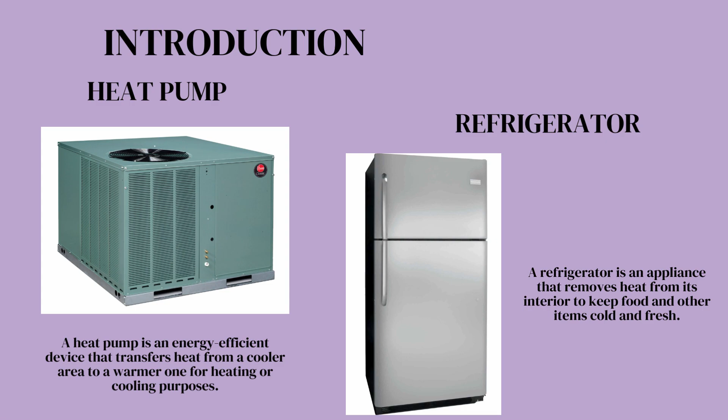Now, you must be very interested in the theory behind refrigerators and heat pumps. I'm going to start and show you the working principle of refrigerators. Refrigerators, just like heat engines, work in a cycle. This is a basic vapor compression refrigeration cycle. The working fluid inside the refrigeration cycle is called a refrigerant.

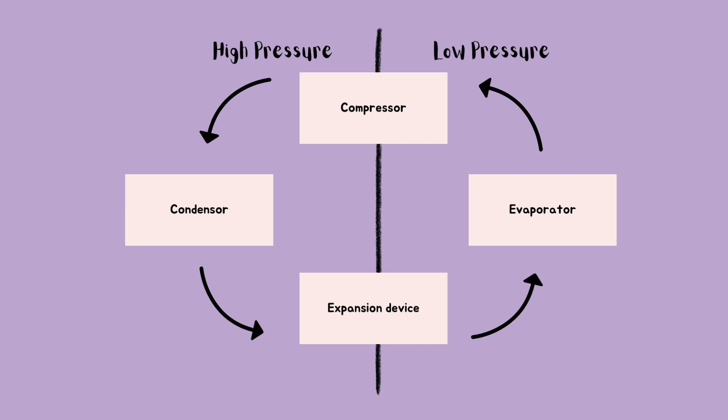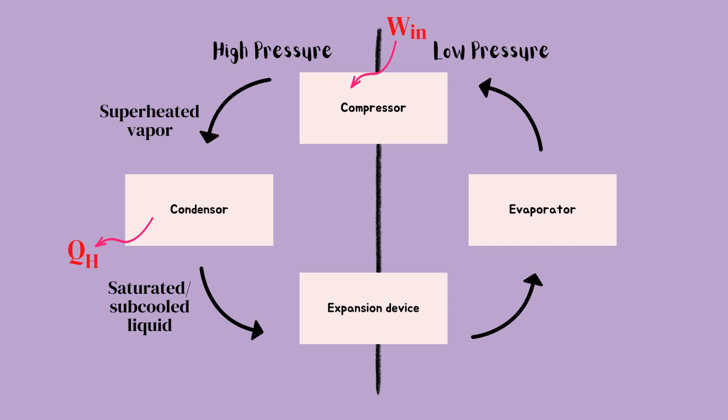The refrigerant enters the compressor as a vapor and is compressed to increase its pressure and temperature by consuming work. It then enters the condenser and condenses to a liquid and cools down. There is heat output since heat is rejected into the surroundings. It then enters an expansion device, which is used to reduce the pressure and temperature of the refrigerant in order to achieve a liquid-vapor mixture of desirable quality at the exit of the expansion device.

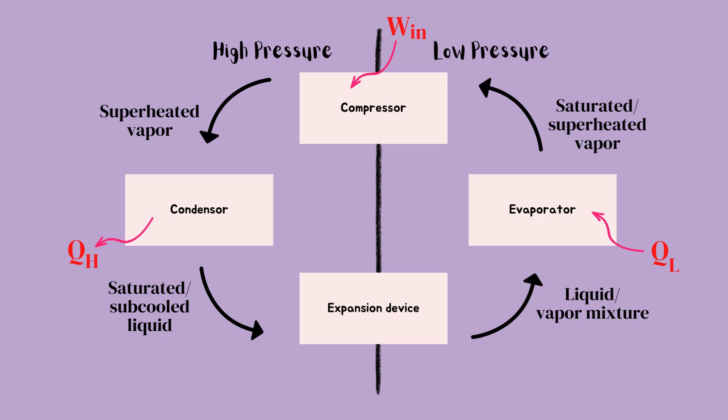Now, it enters an evaporator where the refrigerant evaporates by absorbing heat in the refrigerated space. The refrigerant changes from a liquid to a vapor. It will then go back into the compressor as a vapor, and the cycle repeats.

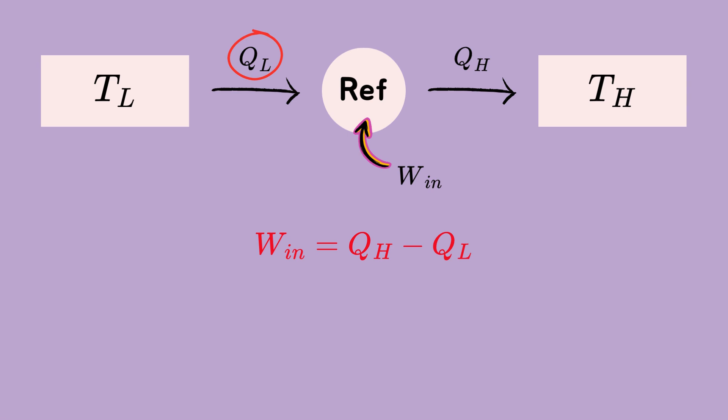Here is a schematic for analyzing the energy conservation in a refrigerator. The main purpose of refrigerators is to remove heat from a heat sink. Therefore, we are interested in the amount of heat that can be removed. From the first law of thermodynamics, we know that the work done on the compressor is equal to the heat released from the condenser minus the heat absorbed by the evaporator. The coefficient of performance of the refrigerator is a dimensionless ratio of desired output heat divided by the required work done, and the formula can be derived as shown below.

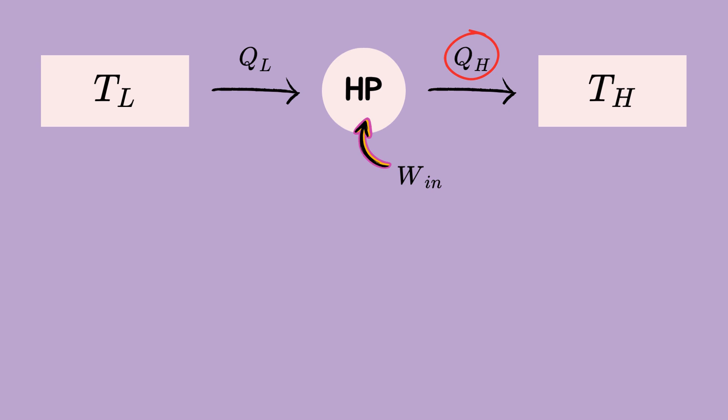Heat pumps absorb heat from a heat sink and deliver heat to a heat source by consuming work. They use the same vapor compression refrigeration cycle, and therefore the schematic is the same also. But different from refrigerators, the main purpose of heat pumps is to add heat to a heat source, such as the indoor space of a building, and we are only interested in the amount of heat that can be transferred from the condenser to the heat source. Hence, the coefficient of performance of heat pumps uses the same concept as before, but we change the desired output to the heat released from the condenser, and the formula is derived as below.

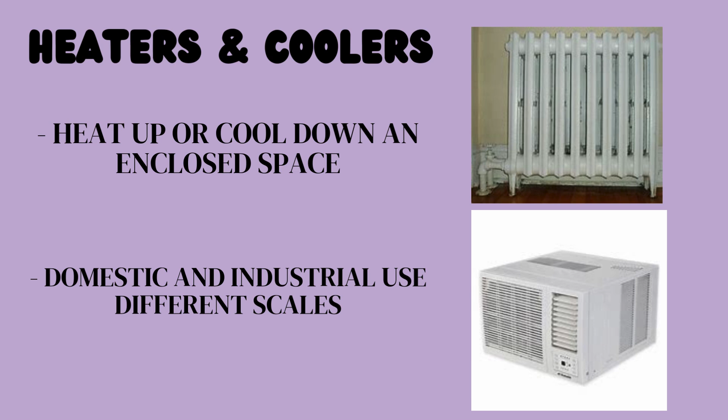Heat pumps are used very widely for many purposes due to their versatility. Thus, they have many practical applications. Firstly, heat pumps can be used as heaters or coolers. They heat up or cool down an enclosed space by transferring heat towards or away from the designated place. Typically, industrial heat pumps transfer more heat faster than domestic ones due to the sheer scale of industries being way larger than domestic ones. Next, a heat pump can surprisingly work as a dehumidifier.

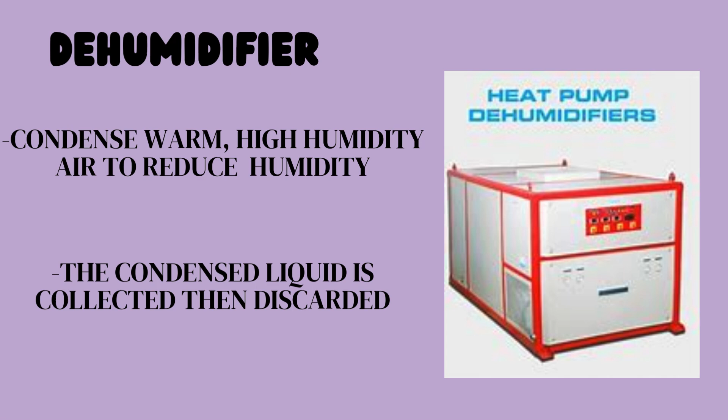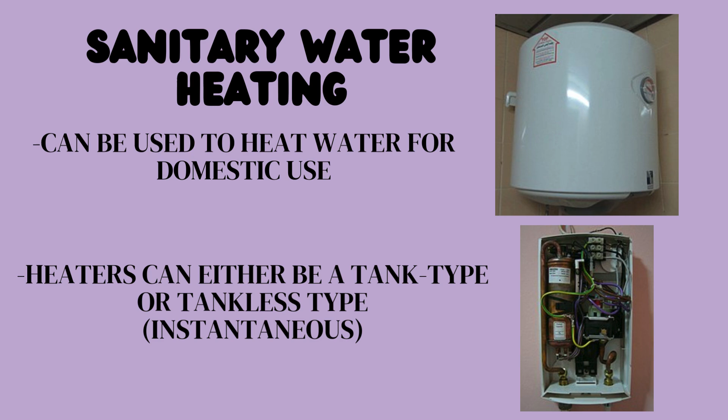By cooling down and condensing very warm, wet air into liquid, the water content in said air decreases. This is usually done to protect items such as furniture or machinery in places where humid air is very common, such as countries in tropical climates. In addition, heat pumps can work to heat up water for domestic use. These heaters can either be a tank type or tankless type, in which the water is heated directly for use. Each purpose and situation would call for different heaters, hence the two types.

Finally, another extremely common use of heat pumps is in refrigerators, in which they keep food fresh and edible. Most modern households, restaurants, and factories are sure to have at least one, due to the sheer importance of edible food in society.

Next will be the weaknesses and strengths of the heat pump. For the weaknesses of the heat pump, it has a high initial installation cost, is less effective in extremely cold climates, requires electricity to operate, and may need backup systems in freezing temperatures. And lastly, its installation can be complex.

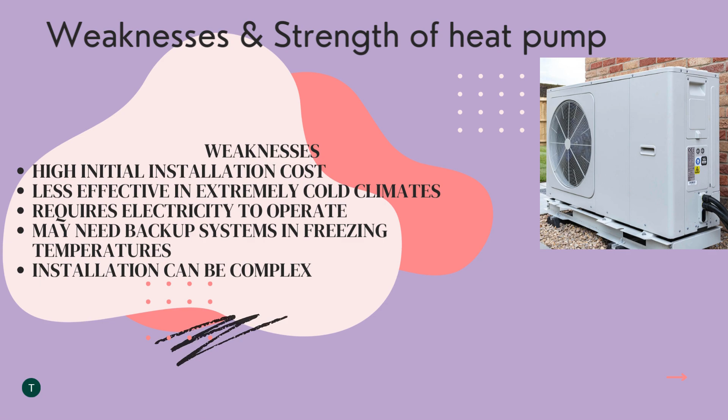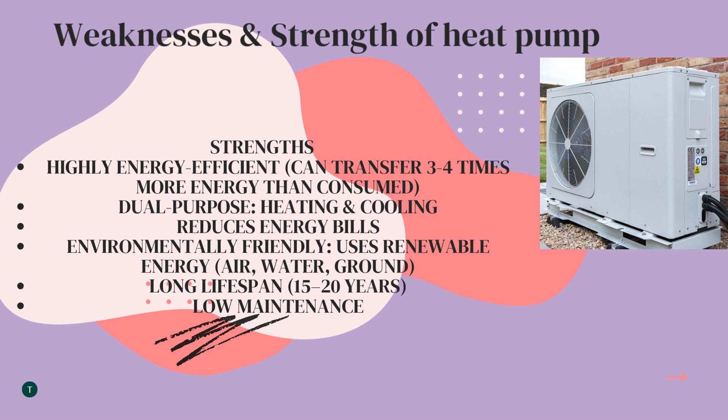For the strengths of the heat pump, it is highly energy efficient. It can transfer 3 to 4 times more energy than consumed. It has a dual purpose, which is heating and cooling. It can also reduce energy bills. And it is environmentally friendly because it uses renewable energy such as air, water, or ground. It has a long lifespan of 15 to 20 years, and it has low maintenance fees.

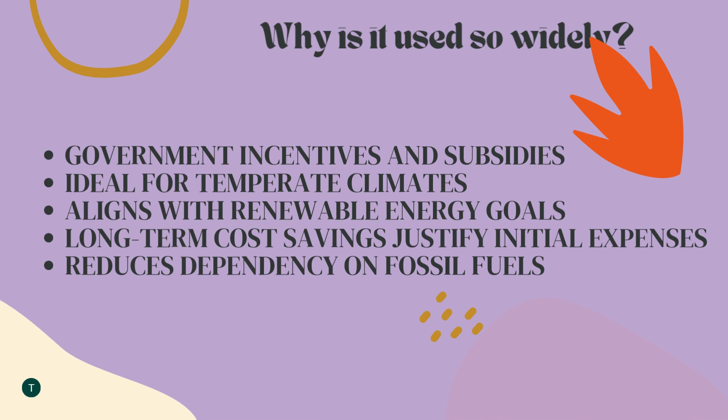So why is the heat pump used so widely? Firstly, because of government incentives and subsidies. Secondly, it is ideal for temperate climates. It also aligns with renewable energy goals. It has long-term cost savings that justify initial expenses, and lastly, it reduces dependency on fossil fuels.

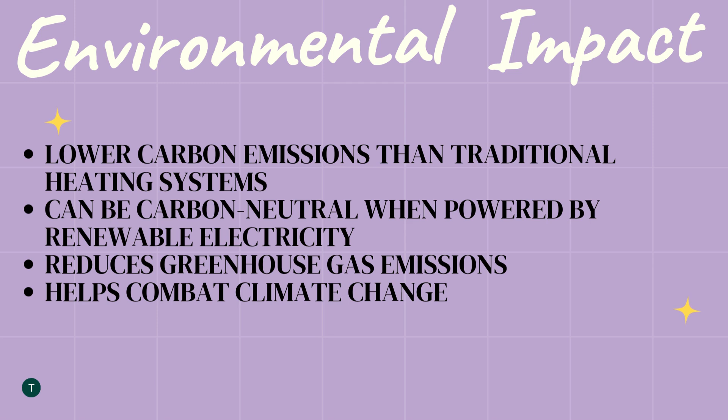However, it still has an environmental impact. Firstly, it has lower carbon emissions than traditional heating systems. Secondly, it can be carbon neutral when powered by renewable electricity. Thirdly, it also reduces greenhouse gas emissions. And lastly, the heat pump will help combat climate change.

So here are two questions I would like to ask. For the first question, in a refrigerator, heat is transferred from a lower temperature medium, which is the refrigerated space, to a higher temperature one, which is the kitchen air. Is this a violation of the second law of thermodynamics? Explain. The second question: define the coefficient of performance of a refrigerator in words. Can it be greater than unity?

Answer for the first question: no, because the refrigerator consumes work to accomplish this task. For the second question, the coefficient of performance of a refrigerator represents the amount of heat removed from the refrigerated space for each unit of work supplied. It can be greater than unity.